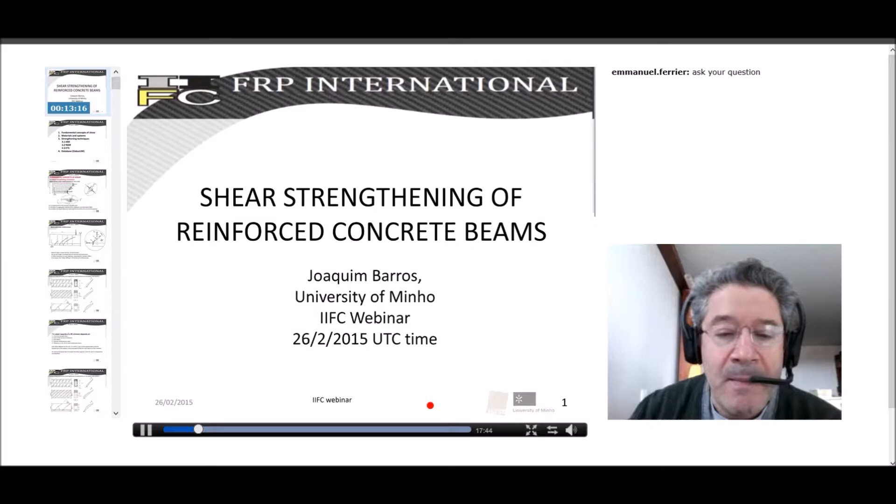The talk today, as Emmanuel has indicated, is about shear strengthening of reinforced concrete beams. This talk is quite close to the one I did last year, because it resumes what I think is fundamental on this type of subject. The presentation is organized into these main 4 topics.

The first one is the fundamental concept of shear. The second is about materials and systems, but I will not spend too much time on this topic because in previous webinars my colleagues have already talked about materials and systems used for the structural rehabilitation of concrete structures mainly. And the third one is in fact the most relevant topic, the main part of this presentation.

Because it's dedicated to the EBR, NSM, and ETS techniques for shear strengthening. And finally, I hope to have time to talk a little bit about the DabasUM, a database that we are developing at the University of Minho, with the main purpose of assessing or verifying the reliability of the available design guidelines for shear.

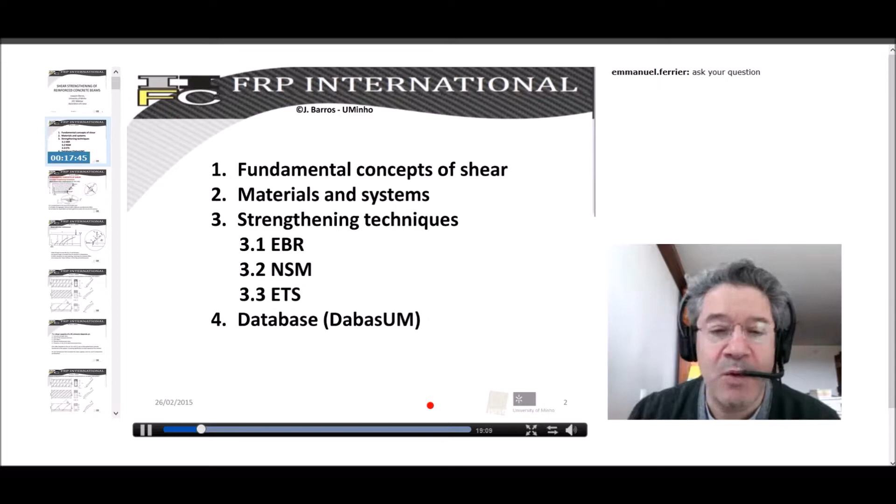Going directly to the first topic, dedicated to the fundamental concept of shear. In fact, when we have a reinforced concrete beam that fails in shear, it mobilizes mainly three types of mechanisms. This one, which I designate VCZ, is proportional to the concrete strength class.

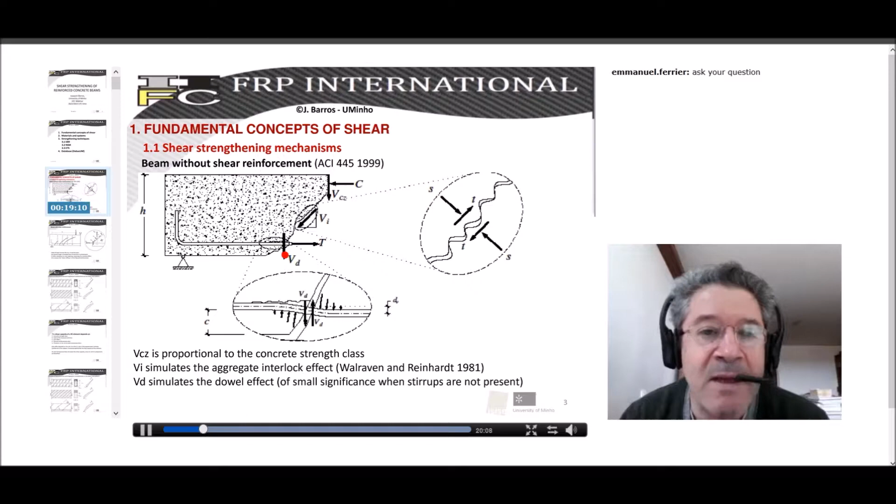This part corresponds to the uncracked zone of the concrete. The other one is VI, that simulates the aggregate interlock effect. And finally, the third one corresponds to the simulation, or the contribution, of the dowel effect, or the contribution of the longitudinal bars to the shear strengthening.

When we have the stirrups represented here, the stirrups have beneficial effects in all the previous terms, because, for instance, in the case of the favorable effect for the VCZ, what happens is that when we have these stirrups, we have a larger uncracked concrete zone, and consequently a higher contribution of uncracked concrete to the shear strength.

But the stirrups also have a beneficial effect for the VI contribution, for the aggregate interlock effect. Why? Because the stirrups crossing the diagonal cracks limit the crack width and the crack sliding, and the benefit we have is a direct benefit in terms of aggregate interlock, because the aggregate interlock is more effectively activated.

And finally, since the stirrups embrace the longitudinal reinforcement, what happens is that it increases the shear stiffness of this flexural reinforcement, and so it is promoting or increasing the dowel effect. So in fact, the stirrups have this type of benefit in all three terms that I explained before.

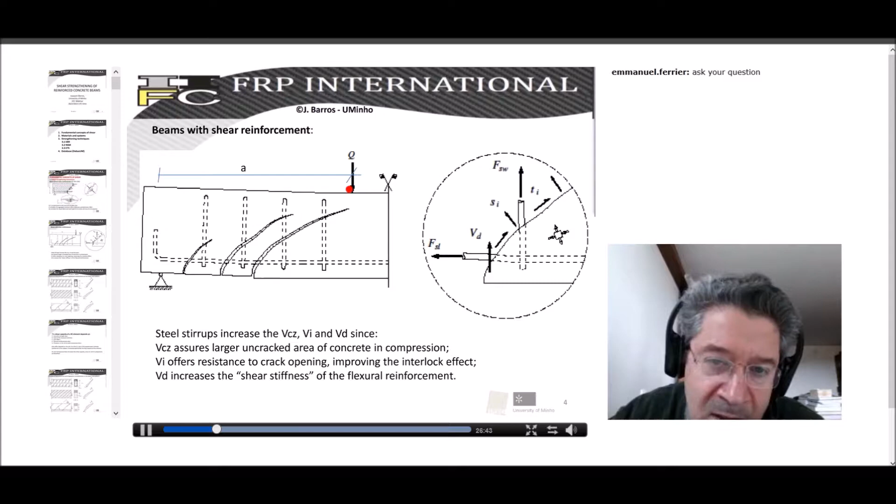A is the distance between the support and the applied load. And A divided by D, D is the internal arm, the distance from the longitudinal reinforcement up to the top surface of the cross section. When the ratio A divided by D is lower than 2.5, what can happen is that part of the load can be conducted directly to the support. In fact, in this case, we have a much higher load carrying capacity, caused by this arch effect.

The shear capacity, as we have already observed, is also dependent on the flexural reinforcement ratio, due to the dowel effect. And it also changes the profile of the crack opening evolution of the shear crack. It also depends on the axial compressive force, because when we have an axial compressive force, it contributes to a larger area of uncracked concrete, and also a smaller crack width, which promotes or enhances the aggregate interlock effect.

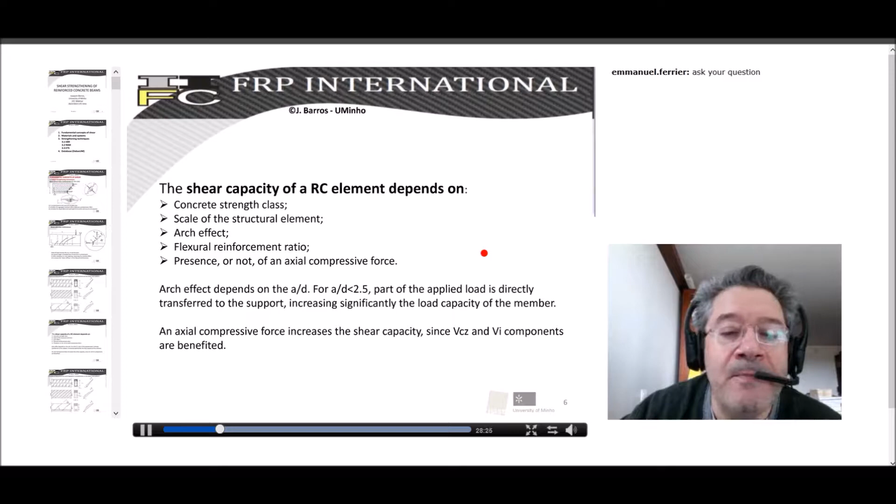So now, the idea is to present the fundamental concepts that are supporting the analytical formulations we will use to estimate the contribution of the FRP. But we need to start by understanding the fundamentals of the analytical formulation.

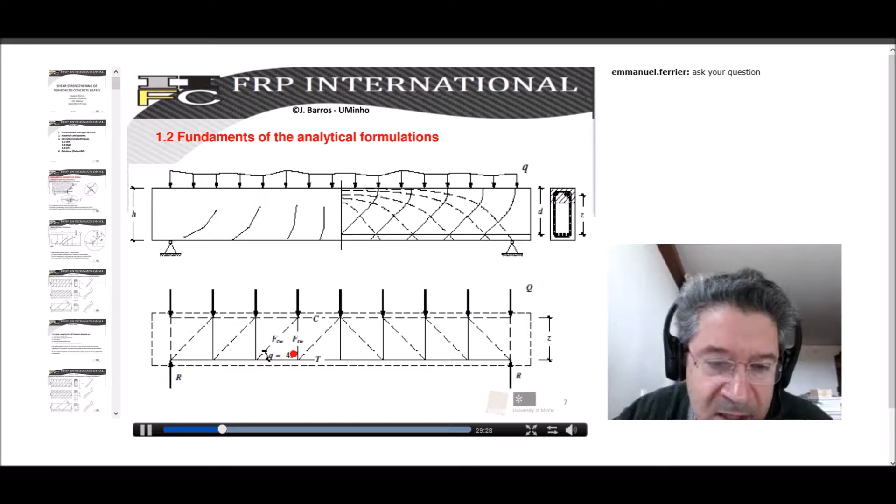When we have a beam supported with a certain descending load, in fact what we have are the isostatic compressive forces. Then we have the compressive struts, and we have the tensile ties, and these tensile ties need to be supported - the tensile force needs to be supported by the stirrups. This is what we are doing: we are introducing the stirrups to support these tensile forces.

If we have a representation of the forces formed when a beam is subjected to shear forces, we have a compressive force in the top part of the beam, the tension supported by the longitudinal bars, and we have a diagonal compressive strut and a diagonal tensile tie.

From equilibrium, the shear force, designated by V, is the vertical projection. The shear force is supported by the tensile force in the stirrup, projected to the vertical direction. This is the force installed in the stirrup, and this is the inclination of the stirrup, and when projected to the vertical it should be in equilibrium with the vertical force.

The force supported by the stirrup - if, for instance, the stirrup has two legs as is normal, we need to take into account that here we have 2 times the cross-section area of the vertical elements. The force supported is the number of stirrups that we have along this length.

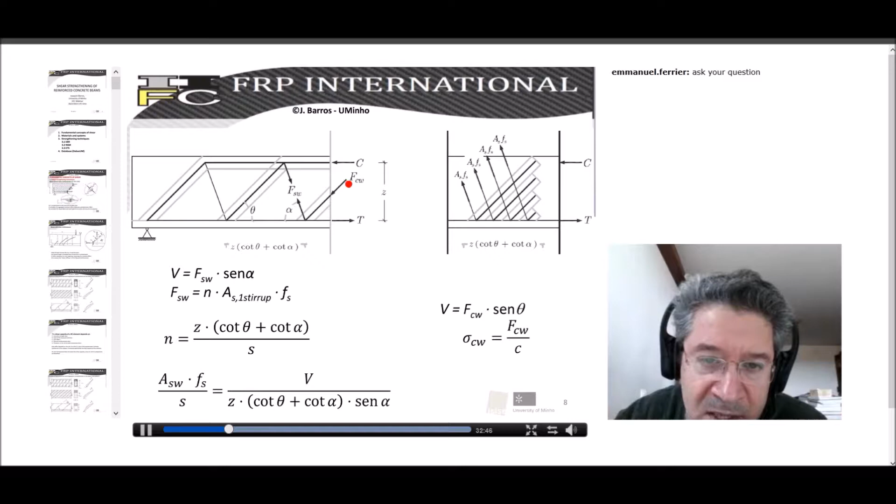So this is the normal equation that we use to evaluate the number of stirrups needed to support the shear force installed in a certain cross-section of the beam. Finally, we need to verify that we do not have crushing in the concrete compressive strut, otherwise we can have a very brittle failure mode.

Now, if we want to increase the shear capacity of a reinforced concrete beam by installing FRP systems, we can have a contribution designated by VF. So the total resisting force is the contribution of the concrete plus the contribution of the existing steel stirrups, now adding a term that is the contribution of the FRP.

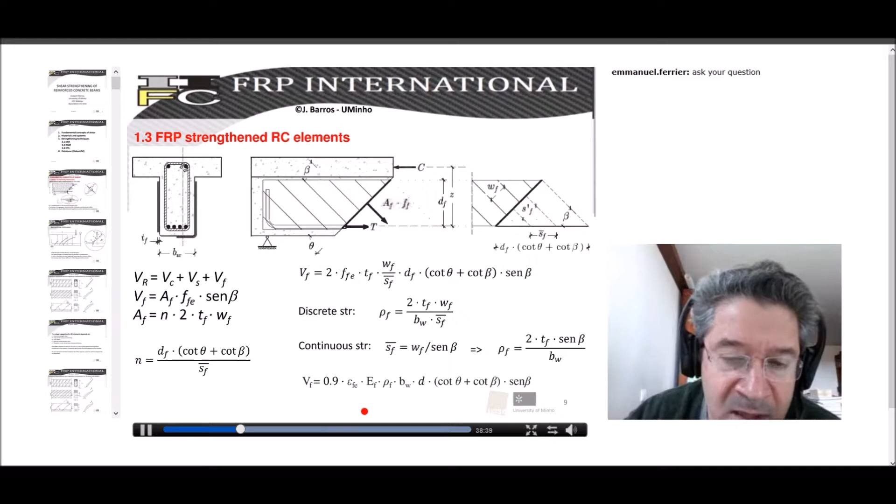So now the problem is how to evaluate the effective strain. According to the available experimental research in this topic, we realized that the effective strain decreased significantly with the stiffness of the FRP shear strengthening configurations.

And this stiffness is a product of the shear reinforcement ratio by the elastic modulus of the FRP materials that we are using.

This data was obtained by Professor Triantafillou some years ago, and this data is from Khalifa, who was in fact a co-author. But what happened is we realized that we see a clear tendency for a decrease of the effective

tensile strain with increase of the stiffness of these FRP systems. And it was proposed this equation that evaluates the R parameter, and then R is multiplied by the ultimate strain, and then we can have an estimation of the effective strain.

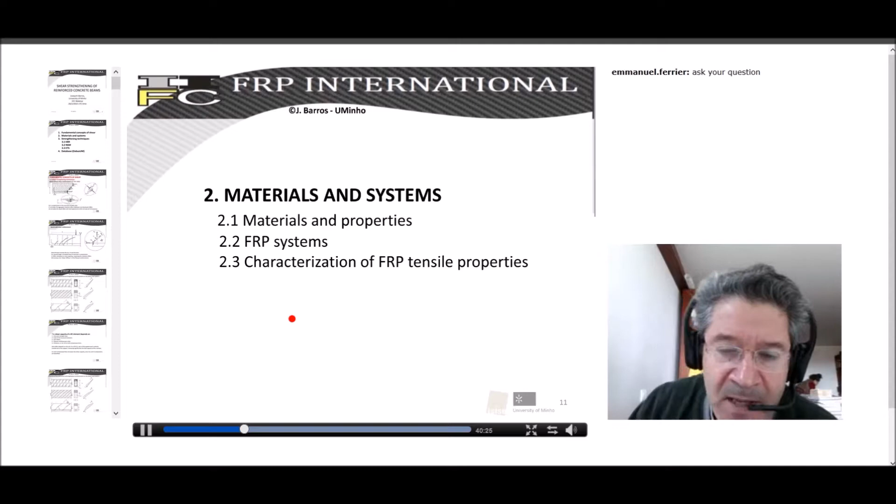Now I have a short presentation about materials and systems used for shear strengthening, but I will not spend too much time on this topic because, as I told already, my colleagues talked about this in the previous webinars. So this is the relationship between stress and strain for several types of materials.

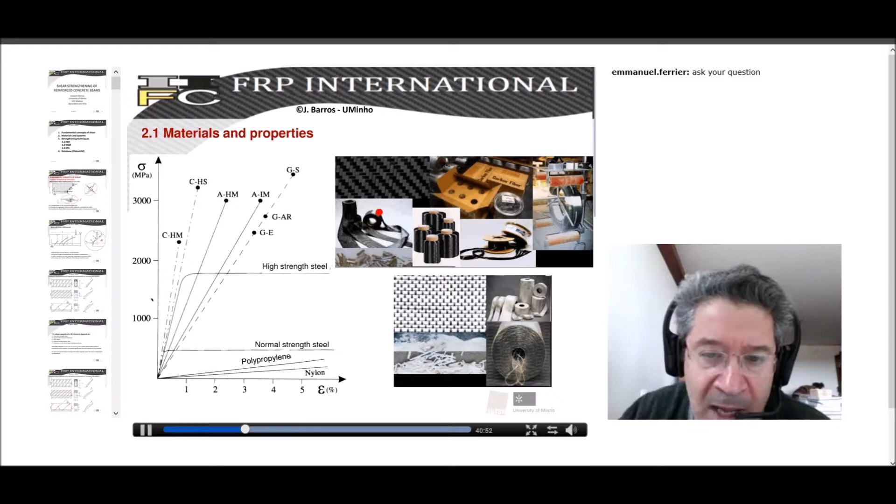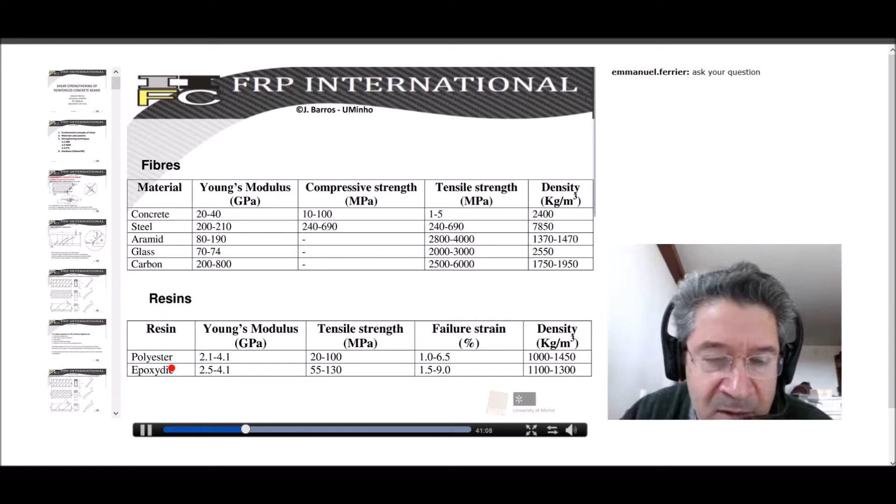But in case of shear strengthening, we are mainly using carbon fibers, using wet layup systems or laminates. We use in general epoxy resins to bond the CFRP systems to the concrete substrate, and the properties are indicated in these tables.

I will not spend time on this because you know this quite well. In terms of FRP systems, we have the prefabricated types where we can use bars or laminates, and then we use an adhesive system to glue or fix the FRP bars or laminates to the concrete substrate.

Or we can also use a wet layup system that is formed by a sheet or tissue, and it is also fixed or bonded to the concrete substrate by an epoxy system.

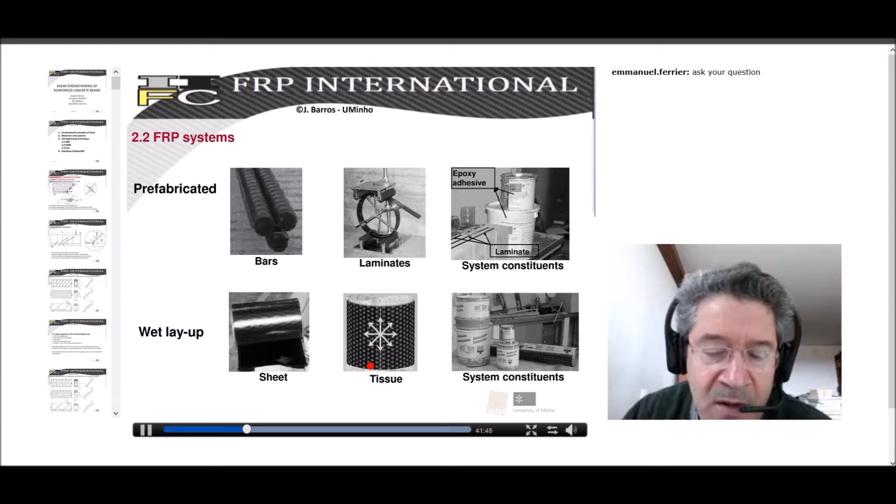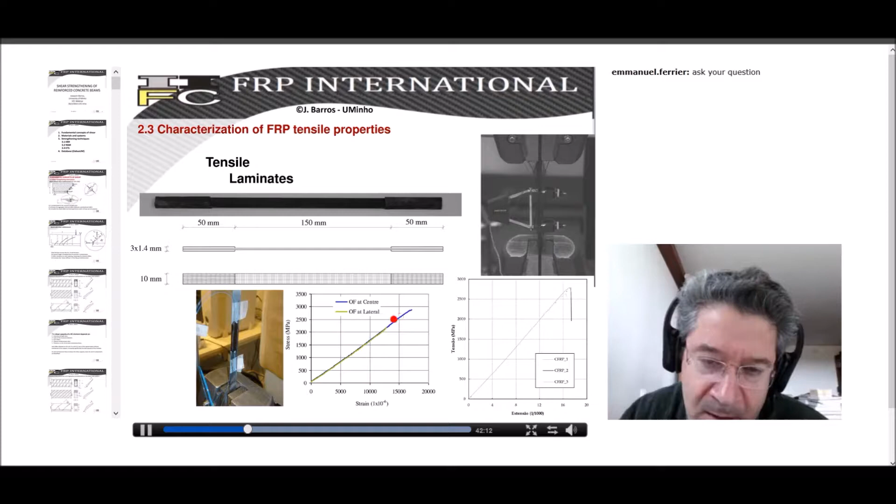To characterize these materials, we executed some coupons of laminates or wet layup systems, and we execute tensile tests in order to obtain the stress-strain relationship that, as you know, presents a linear elastic diagram and then fails abruptly.

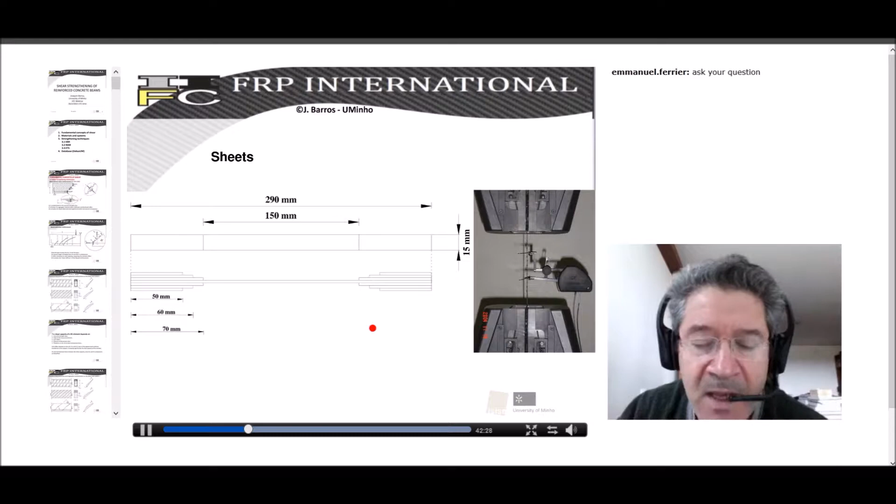So this is the type of coupons that we produce to characterize the tensile behavior of the wet layup systems.

It is also important to characterize the properties of the adhesives, mainly when we want to model the nonlinear behavior of reinforced concrete beams strengthened with CFRP systems.

In this case, it's important to know the relationship between stress and strain, and we realize that it is almost linear in the first stage, but then due to the formation of micro cracks in the microstructure of the adhesive, we have a non-linear behavior up to failure.

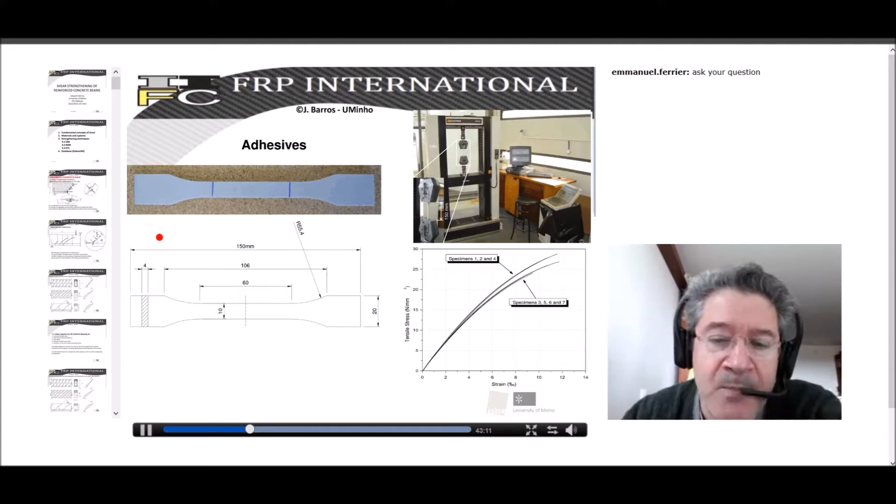In terms of strengthening techniques, as I will analyze in this lesson, I'm focusing mainly on three techniques: the EBR, the NSM, and the ETS.

In the EBR technique, I will present the shear strengthening configurations most used in this technique, as well as the shear strengthening effectiveness based on experimental evidence.

And finally, I will present the design formulations according to FIB, the European approach, the American approach ACI, the Italian design guideline, and the Australian design guideline.

And then I'll use an example in order to teach you how to use this formulation to estimate the contribution of the FRP system to the shear strength of a reinforced concrete beam.

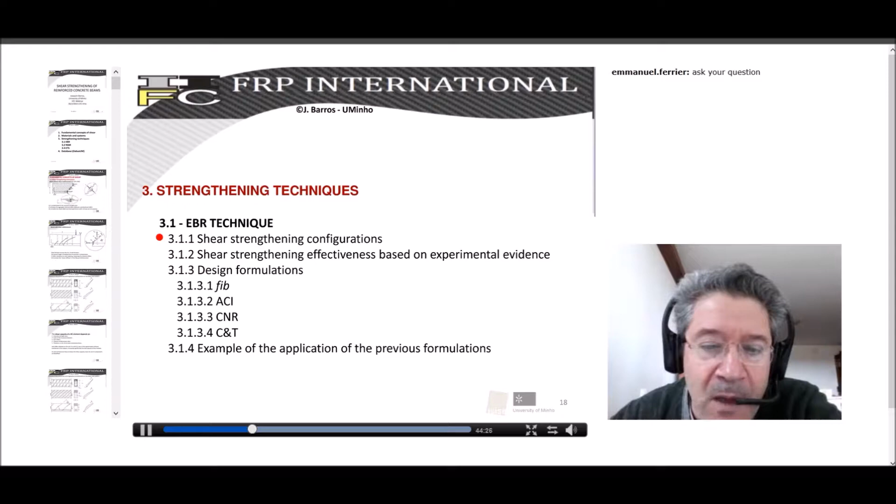The most common EBR strengthening configurations are represented here. This is a full wrapping, and I use the symbol O to indicate the full wrapping shear strengthening configuration. We also have a U configuration where the FRP systems are bonded to lateral surfaces, but also to the bottom surface of the cross section.

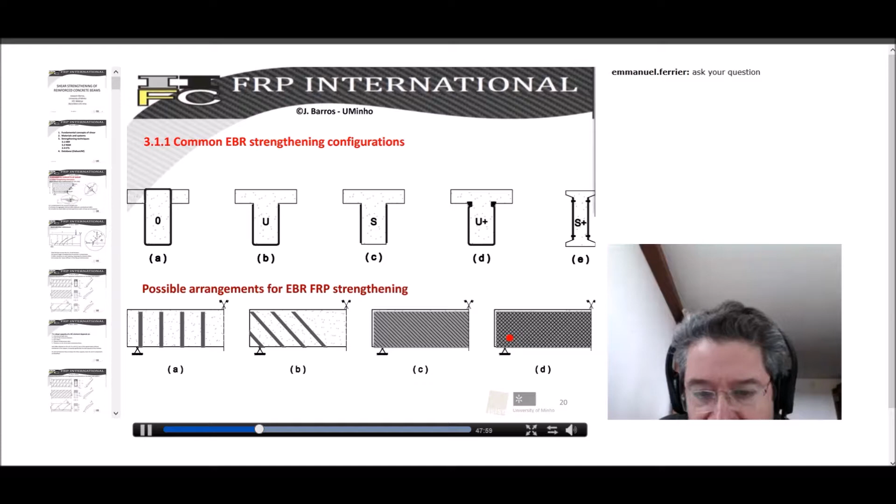I'm presenting now some experimental results to show important aspects in terms of the effectiveness of different shear strengthening configurations. This was a study carried out by Professor Khalifa, where we have the reference beam C-BT1, C-BT2, and one layer of U configuration where the fibers are in the vertical direction.

In C-BT3, 2 layers were installed: a vertical layer with the fibers oriented at 90 degrees (vertical), and another layer in the horizontal direction, at 0 degrees. So 2 layers in this case.

In C-BT4 and C-BT5, we are using strips of wet layup system, where each strip has a width of 50 millimeters, and the distance between strips is 125 millimeters. In C-BT4 the same strips with the same width and spacing are used in a U configuration, while in C-BT5 they are installed only on the lateral faces in an L configuration.

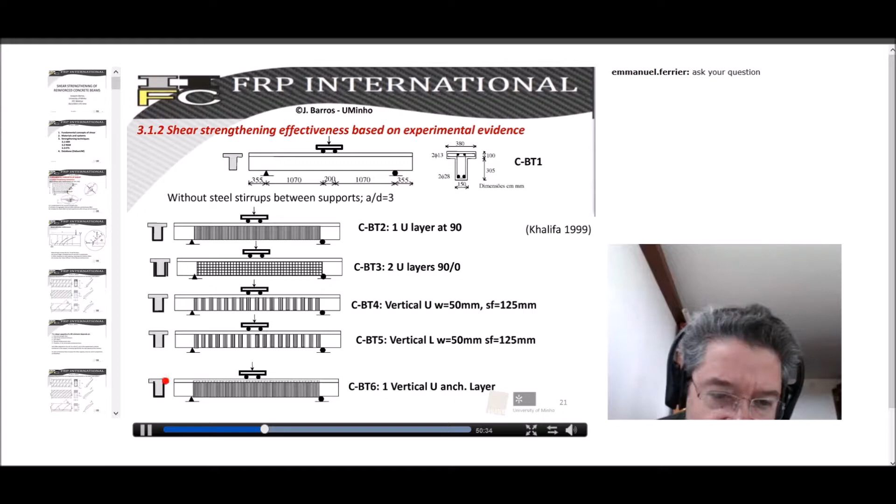Finally, in C-BT6, we are using a vertical layer, a U configuration with fibers in the vertical direction, but in the top part of the U configuration we are installing an anchorage mechanism, an anchorage device.

Here we have the relationship between the applied load and the mid-span deflection. The first clear aspect is comparing the force-deflection relationship obtained in the reference beam, where we don't have any shear strengthening system, that gives the minimum load. For the other beams, we realize a significant increase in ultimate load, between 35% and 145%.

A very important aspect is comparing the beam with 2 layers in U configuration, where one layer has fibers at horizontal direction (0 degrees), to the same beam with only 1 layer applied in vertical, without the horizontal layer. We realize the values are almost the same, so the horizontal layer has a very small contribution to the shear capacity of the beam.

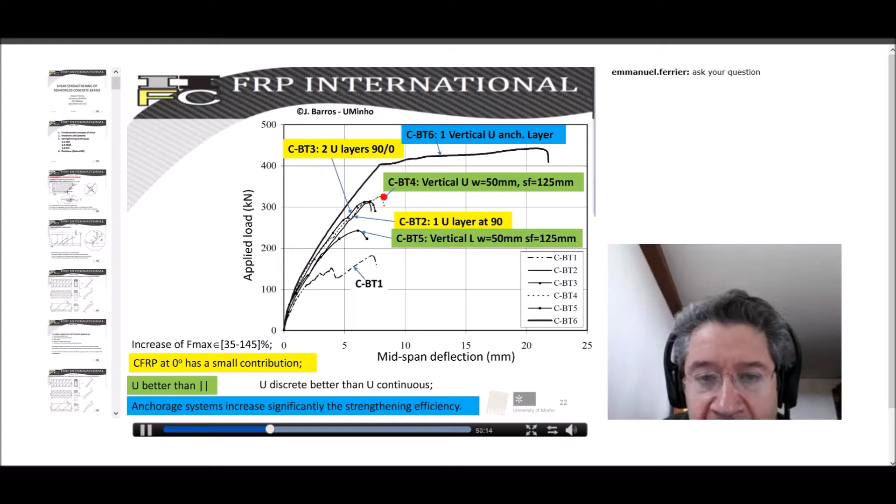Another aspect: comparing the beam with vertical strips of wet layup system, formed by strips of 50 millimeters width spaced at 125 millimeters, to the one composed of the same type of strips but placed laterally, we realize that the U configuration is much more effective in terms of shear strengthening than the one with FRP systems applied only on lateral faces. This is a very important aspect.

Finally, we realize that when we introduce anchorage mechanisms, we increase the capacity significantly, and in this case it was possible to transform the shear failure mode into a flexural failure mode.

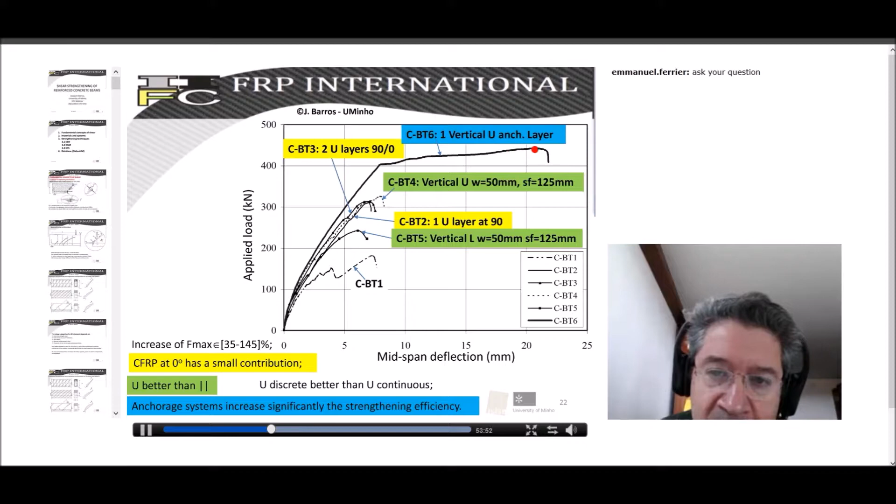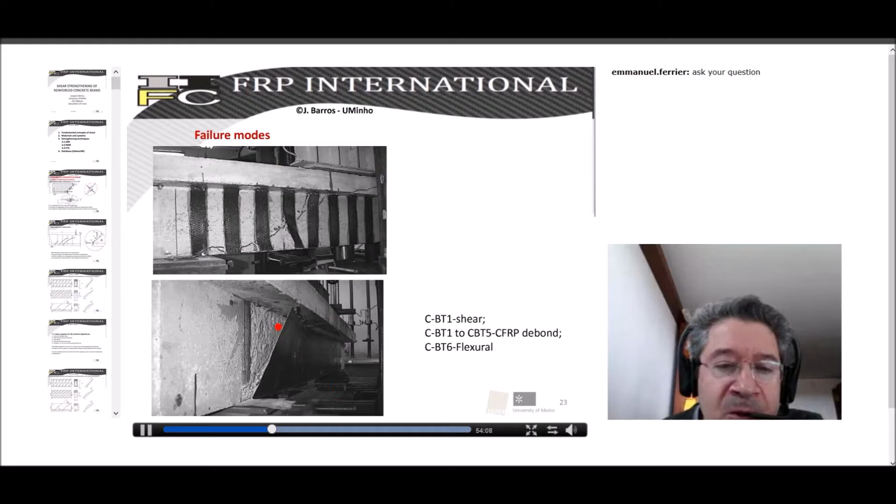Well, now this is the typical failure mode. We have debond in case of a continuous system formed by wet layup system. And here in this case, we have also the rupture of the FRP and debond.

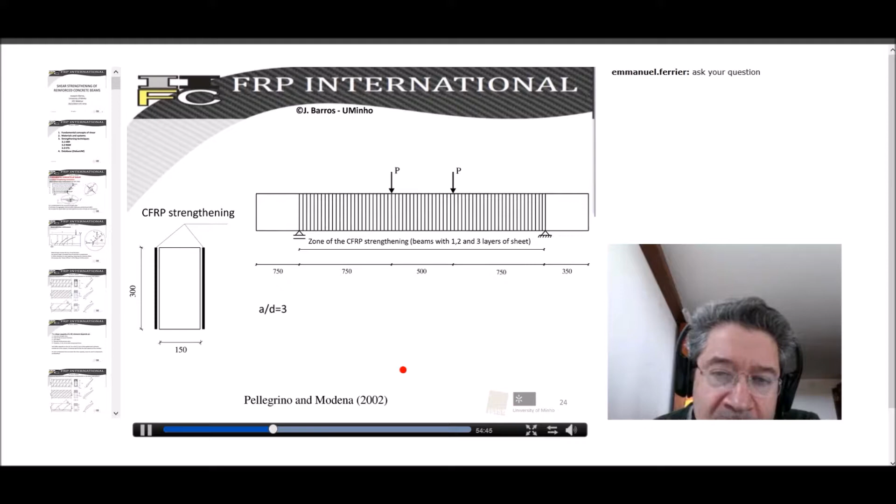In another work done by Professor Pellegrino and Professor Modena, they executed an extensive program, but I will focus on only one very important aspect: the influence of the existing steel stirrups.

For instance, in this beam, 3 layers of CFRP were applied, installed on the lateral faces. But in this case, the beam does not have stirrups, so the existing shear reinforcement ratio is 0.

When we apply the 3 CFRP layers, we obtain an increase of the shear strength capacity for the beam. The increase was 51%.

For the same beam, but with a difference of having a certain percentage, 0.33%, in terms of existing shear reinforcement ratio assured by steel stirrups, we realize that the increase provided by the same shear strengthening arrangement was only 32%.

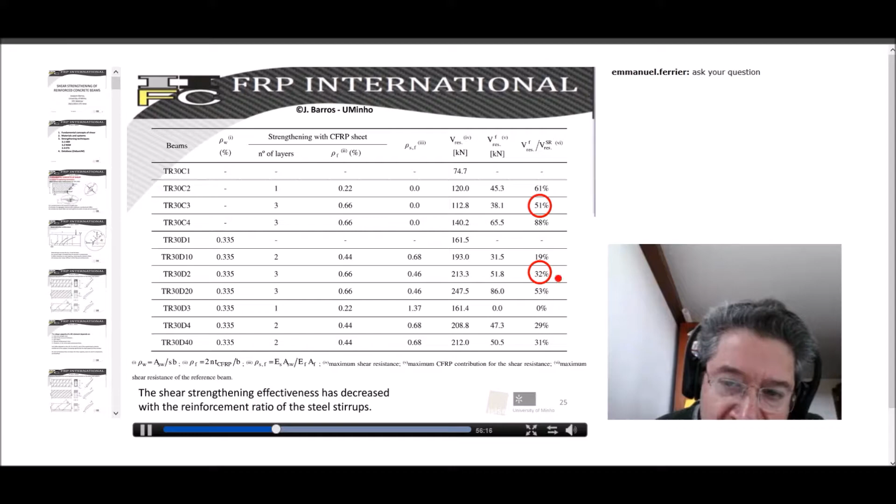This is also observed in all experimental research carried out by several people: the shear strengthening effectiveness decreases with the increase of the reinforcement ratio assured by steel stirrups.

Now, how do we evaluate or estimate the contribution of the FRP systems for the shear strengthening of reinforced concrete beams? We assume this approach: the shear resistance of reinforced concrete beams is the additive contribution provided by the concrete, VC, plus the steel stirrups, plus the contribution of the FRP.

I have here the equations proposed by the FIB, the International Federation for Concrete, and the ACI, the American Concrete Institute, the CNR, the Italian design guideline, and CIDAR, the Australian design guideline.

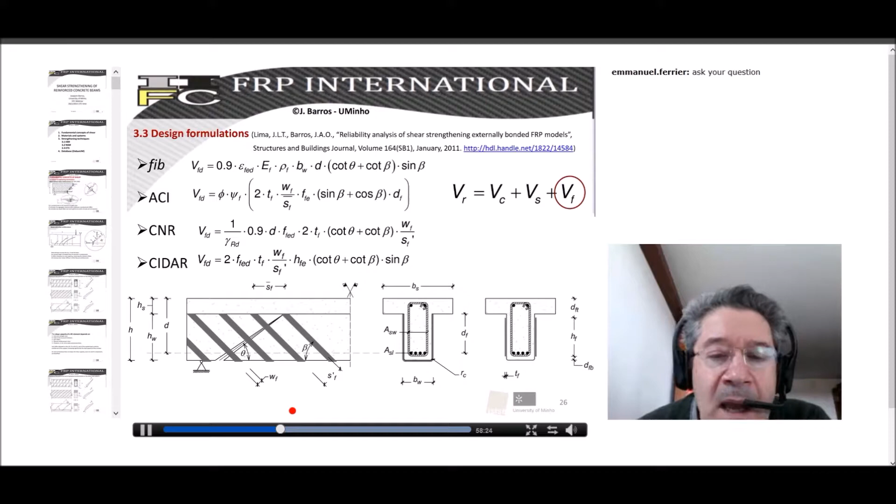In this figure, I have the symbols used in the formulation: that is the inclination of the FRP, that is the inclination of the shear crack, and dF is the distance from the top level of the FRP to the longitudinal reinforcement.

DFT is the distance from the top level of the FRP to the top surface of the cross section. The DFB is the distance from the bottom level of the CFRP to the bottom level of the cross section, or the bottom surface of the cross section.

RC is the radius of the rounding, because in order to avoid stress concentration in the corners of the cross section, we must round these corners, and this is the corresponding radius.

I'm presenting here the formulation of FIB and ACI. In case of the FIB, this is the equation we use to evaluate the contribution of the FRP, and that depends on the shear strengthening ratio obtained from this equation, in the case of using strips of CFRP or continuous systems, this is the equation.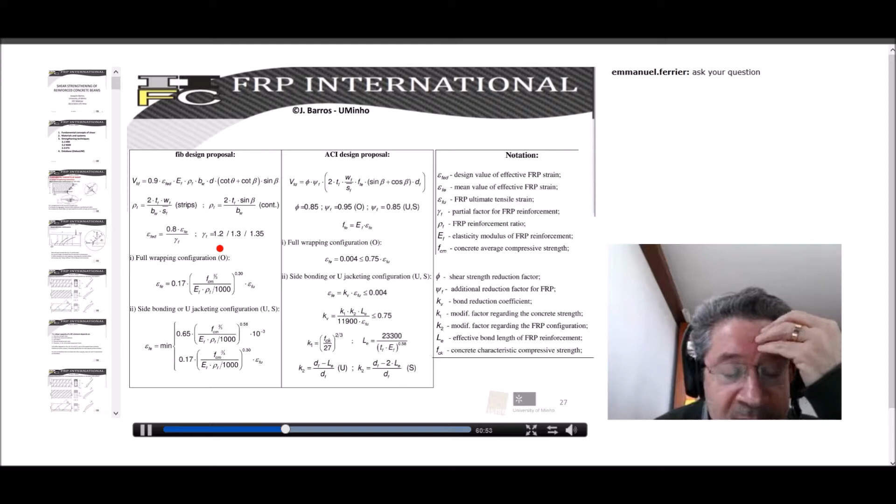Now we need to estimate the effective, or design value of the effective strain in the FRP. Finally, the FIB recommends a safety factor of 1.2, 1.3, or 1.35, depending on the quality control assured when applying these shear strengthening systems in real practice.

We need to distinguish two situations. One is when we are using a full wrapping configuration, involving the entire cross section. In this case, FIB proposes an equation that depends on the average compressive strength of the concrete and the stiffness of the FRP system.

When we use a U or side strengthening configuration, the effective strain is the minimum of the values provided by these two equations. So we need to evaluate both equations, and the minimum one is used to evaluate the effective strain. After we evaluate the effective strain, we replace it here, divide by the safety factor, and finally obtain the design value to estimate the contribution of the FRP system for shear strength according to the FIB.

In case of the American Concrete Institute, this is the equation proposed to evaluate the contribution of the FRP system. It is recommended a phi factor value of 0.85, and for the psi f factor, 0.95 if we adopt a full wrapping configuration, or 0.85 in case of U or side configuration. To estimate the effective stress in the FRP, we need to evaluate the effective strain, because the effective stress is the product of the elastic modulus of the FRP by the effective strain.

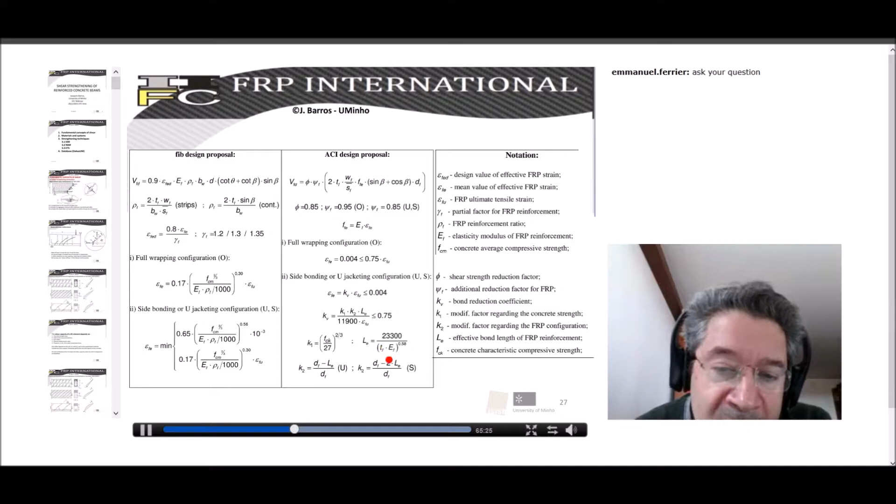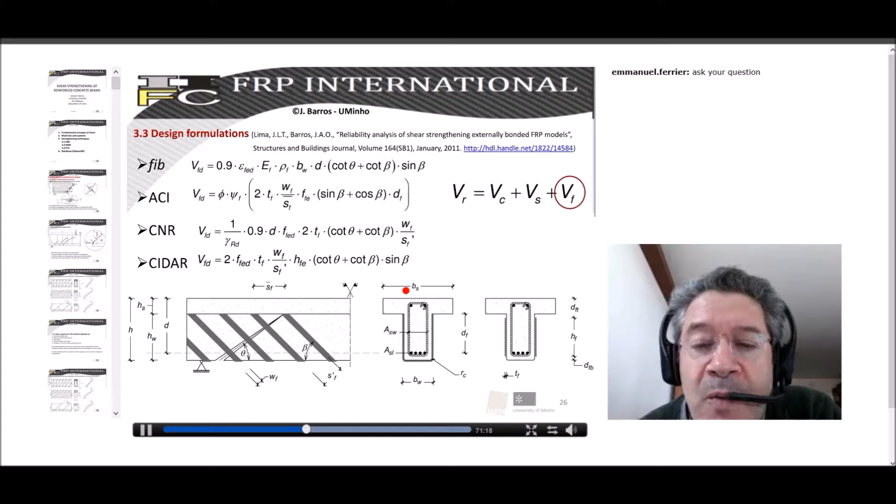So all the information represented in this figure is used now to evaluate these geometric parameters: HFE, ZB, and ZT.

And to evaluate the design value of the effective tensile stress, CIDAR proposed two parameters. The one that is DF is a stress distribution factor, that is evaluated by different equations according to the type of shear strengthening configuration that we will adopt.

And finally, is the maximum design value of the tensile stress installed in the FRP.

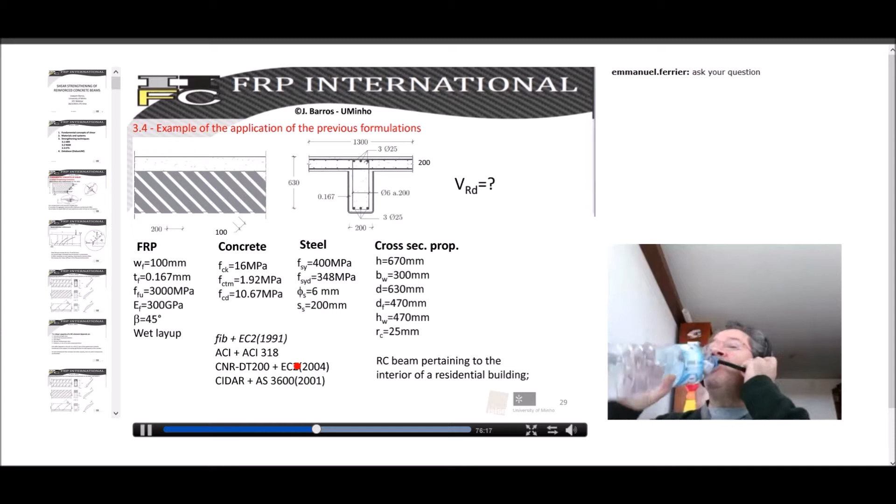Imagine that we have a reinforced concrete beam with this geometry, that has a width of 200. The total depth is 630. This is the longitudinal reinforcement in the bottom, in the top, and it has also some steel stirrups.

Well, the idea is to estimate what is the value, or the shear capacity, of the beam when we install strips of the CFRP with a width of 100 millimeters, indicated here.

The thickness of the FRP is 0.167 millimeter. The ultimate tensile stress is 3000 megapascal. The Young's modulus is 300 gigapascal. The inclination of the FRP is 45 degrees, and we are using a wet layup.

We assume that the concrete of this beam has a characteristic compressive strength of 16 megapascal, an average tensile strength of about 1.9 megapascal. The design value of the compressive strength is 10.7 megapascal.

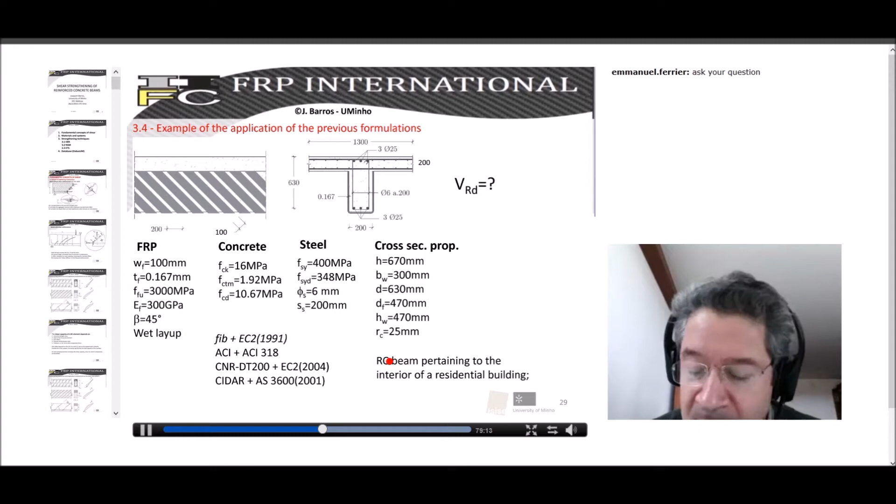Now we will use the FIB approach to estimate the contribution of the FRP plus the Eurocode approach that was the edition of 1991. So nowadays we have a more recent one that we will use with CNR, because CNR is also a more recent approach. So the idea is to be coherent.

So when FIB was published, this formulation to evaluate the contribution of the FRP, the document available to estimate the contribution of concrete and steel stirrups was EC2 of 1991. And now we will start evaluating the shear strengthening ratio.

So this is evaluated from this equation that depends on the thickness, on the width of the strips of CFRP, and on the width of the cross section and the distance between the strips. And then we obtain the corresponding value.

To evaluate the effective strain, tensile strain in the FRP, well, it is the minimum between the two values obtained from these two equations.

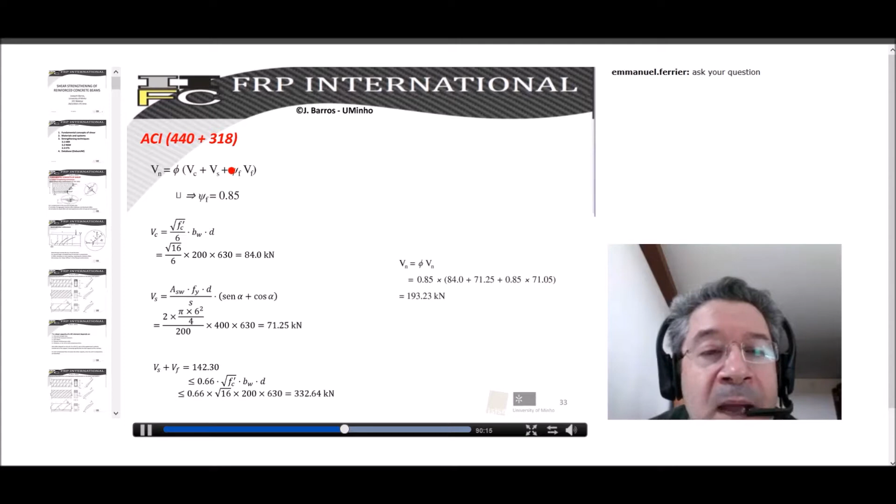And finally, we obtain the shear capacity of the strengthened beam, which is the product of phi, that according to ACI is 0.85, multiplied by the contribution of the concrete, 84, the contribution of the steel stirrups, 71, and the contribution of the FRP, which should be multiplied by the psi f factor, that for U configuration is 0.85. Finally, we obtain the shear capacity according to this approach.

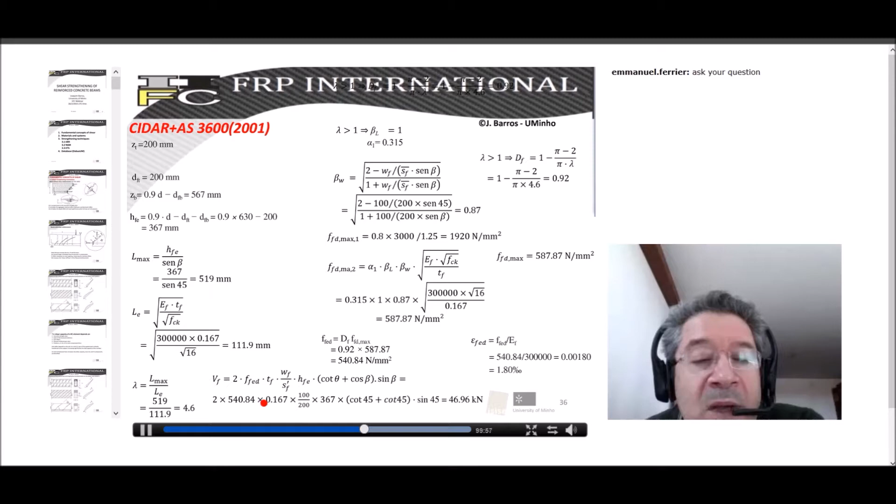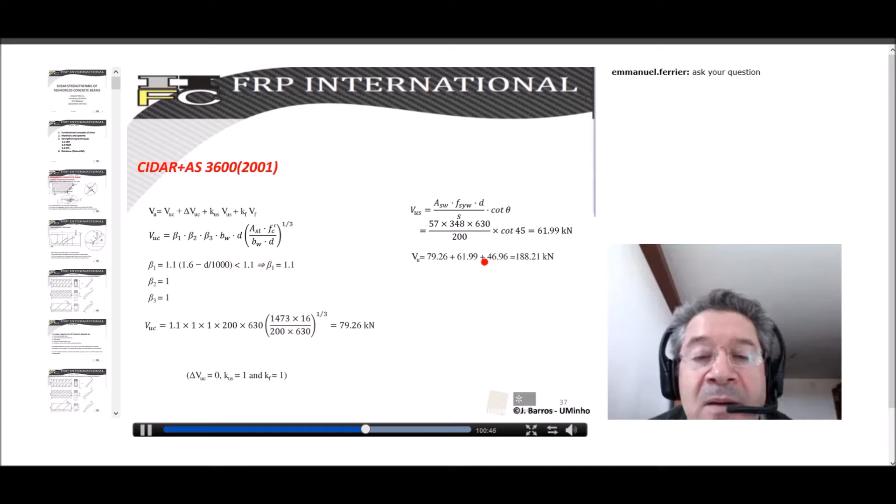So now we use this term, we replace it, and consequently we obtain the contribution of the FRP, computed according to the CIDAR, and considering the Australian design guideline to evaluate the contribution of the steel stirrups and the concrete. This is the equation to evaluate the contribution of the concrete, while this is the equation to estimate the contribution of steel stirrups. Finally, we obtain the shear capacity of the beam, that is the contribution of the concrete, contribution of the steel stirrups, and contribution of the CFRP system. We can compare this in this table.

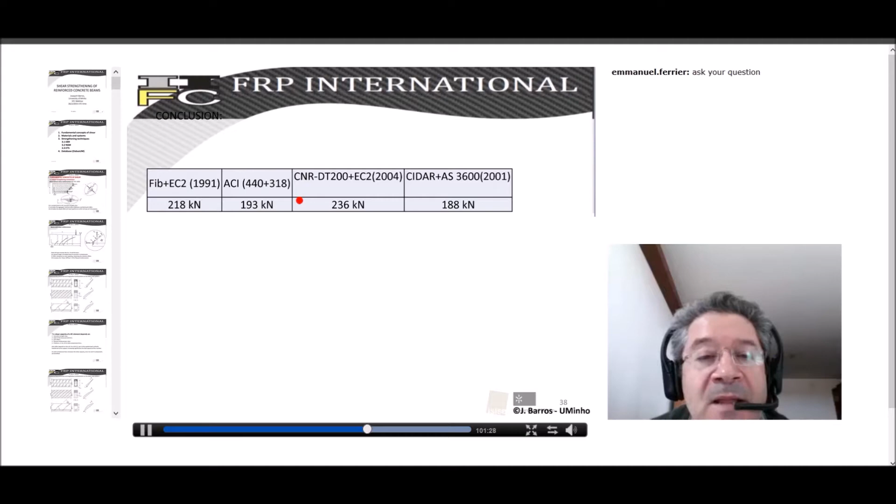I'm comparing. So in fact, the highest value was obtained applying the CNR, the Italian design guideline, with the Eurocode, while the minimum value was predicted or obtained using the CIDAR and the Australian guideline. But the differences are not quite high for this example.

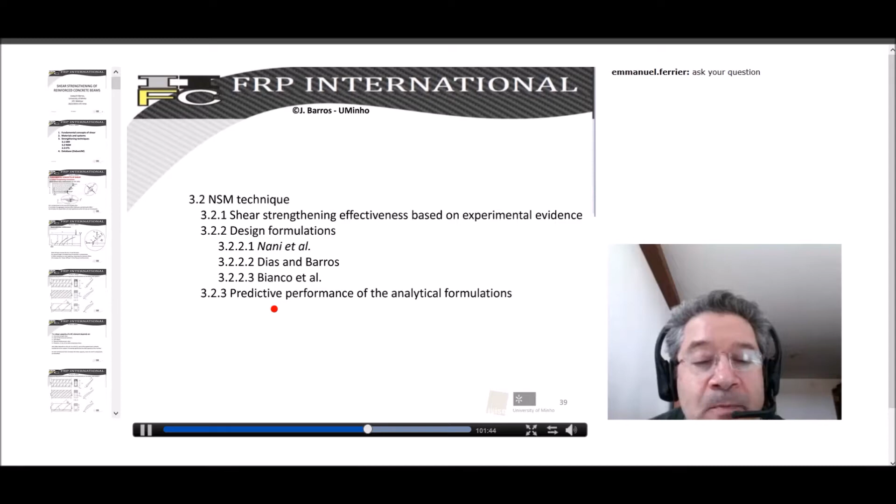Well, for the NSM technique, the near surface mounted technique - I don't know if we have some knowledge on this topic - what we use is we apply the FRP systems in the lateral surfaces of the beam. So we need to open or execute slits in the lateral face, in the concrete surface, in the concrete cover of the lateral surface of the beams.

So in this case, we see several slits open on the lateral face, so we need to clean. Then we cut the laminates or FRP bars. We are cleaning the FRP, in this case the CFRP systems, and in this case we are using CFRP laminates.

Then we fill the grooves with the epoxy. We apply a thin layer of epoxy in the lateral face of the laminates, and then we insert the laminates, and finally we remove the exceeding epoxy, and we finalize the process of applying the strengthening technique using the NSM.

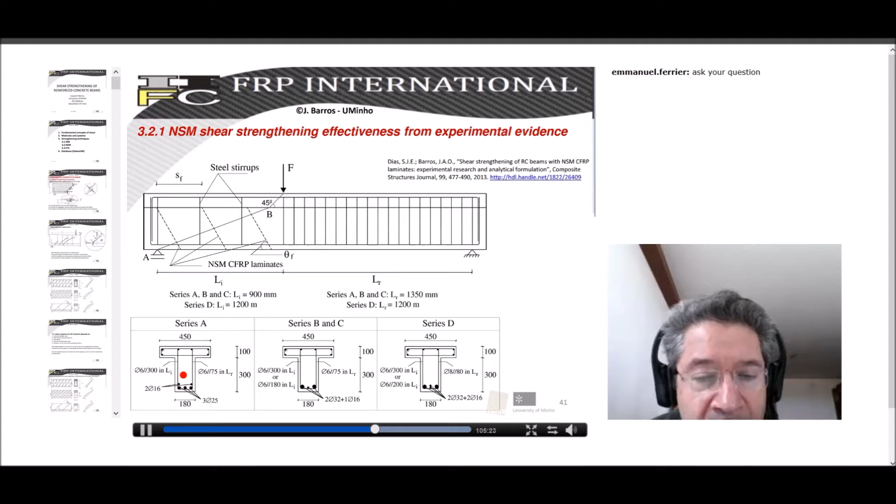And then look what happened in terms of the influence of the compressive strength of concrete. In series C, in the series of beams, we used a concrete of very small compressive strength - the average value was around 19 megapascal. In series B, we adopted a concrete of about 40 megapascal. And finally, in series D, we used a concrete of about 60 megapascal.

And in this graph, we have a relationship showing the contribution of the FRP system, which was composed by laminates. In this case, we used rectangular cross-section FRP laminates with a cross-section area of 1.4 millimeters by 10 millimeters.

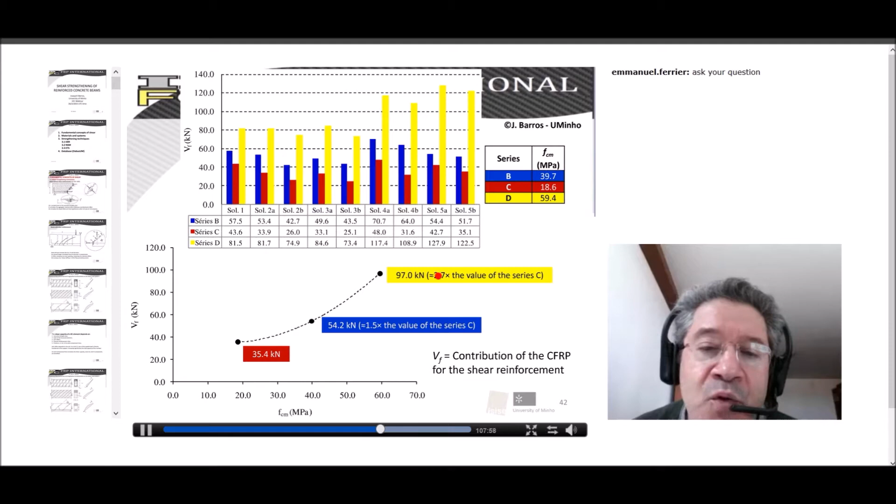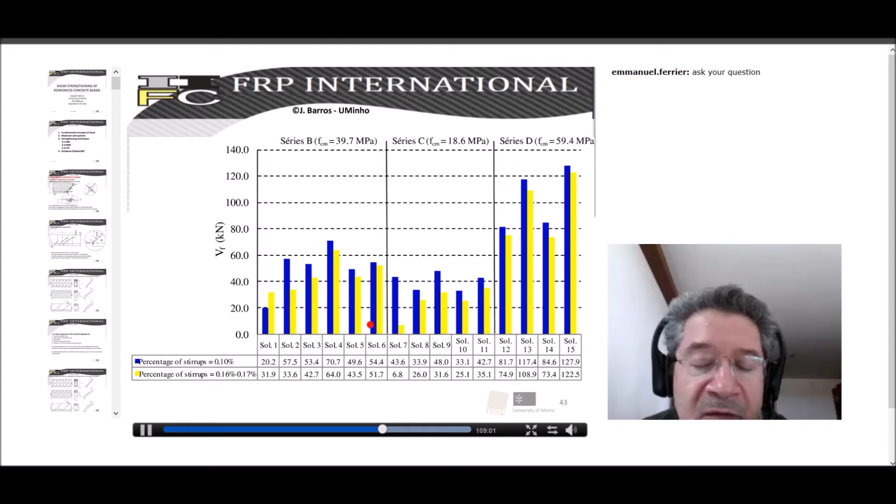Another important conclusion from this series of tests concerns the effect of the percentage of existing steel stirrups. In yellow, we have the contribution of the CFRP beams when using the highest percentage of steel stirrups, between 0.16 and 0.17. In blue, the percentage was 0.10. From these graphs it's clear that as the percentage of existing steel stirrups increases, the effectiveness of the shear strengthening arrangements decreases.

This means we can have three types of failure modes. We can have rupture of the laminate, which we observed when reinforcing beams with the highest compressive strength—in some cases the laminates even failed by rupture. In other cases, we have bond failure followed by fracture of the concrete surrounding the laminates.

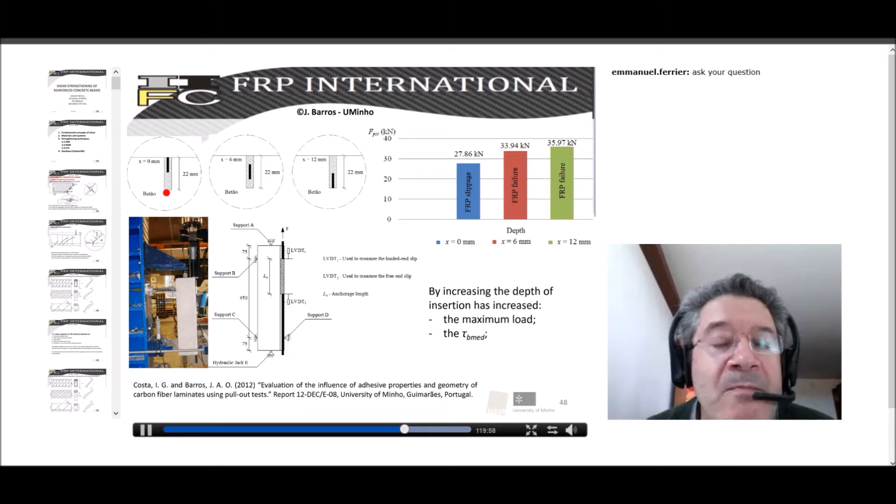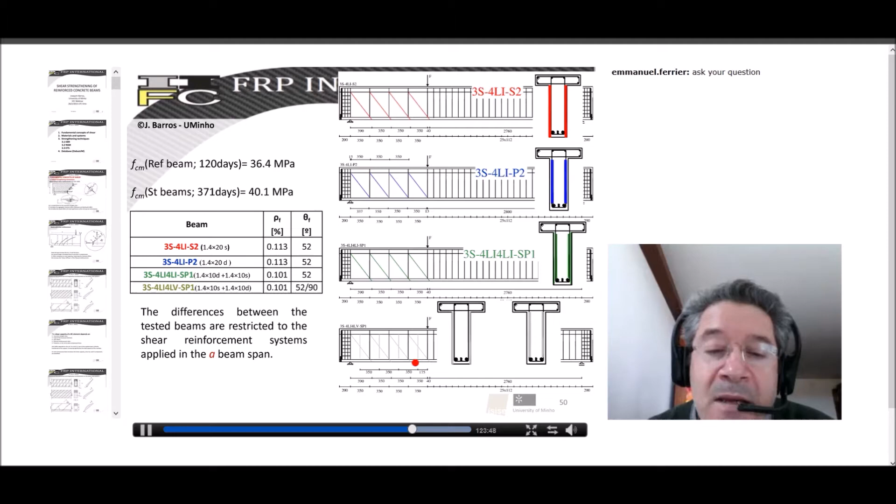And I only highlight the relevant aspects. Look, for instance, if I'm comparing these two beams, this is the force-deflection for all the beams, and if I'm comparing the shear strength contribution...

for the beam where we install 4 laminates but deeper, and 4 laminates at the surface, we obtain a shear strength effectiveness of about 68%, while when I install the same laminates but deeper in the groove, I obtain a shear strength effectiveness of 81%.

So, in fact, we can conclude that if we have the possibility to install the laminates deeper in the cross section of the beam, we have a higher effectiveness for the FRP systems.

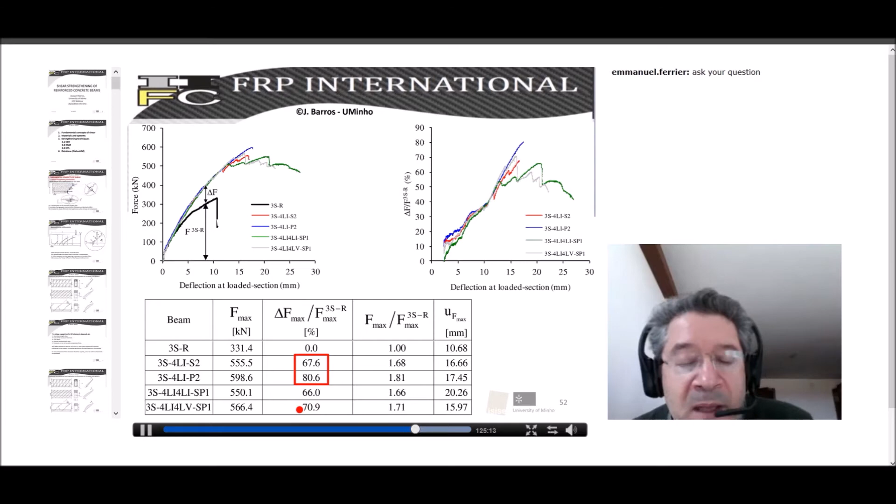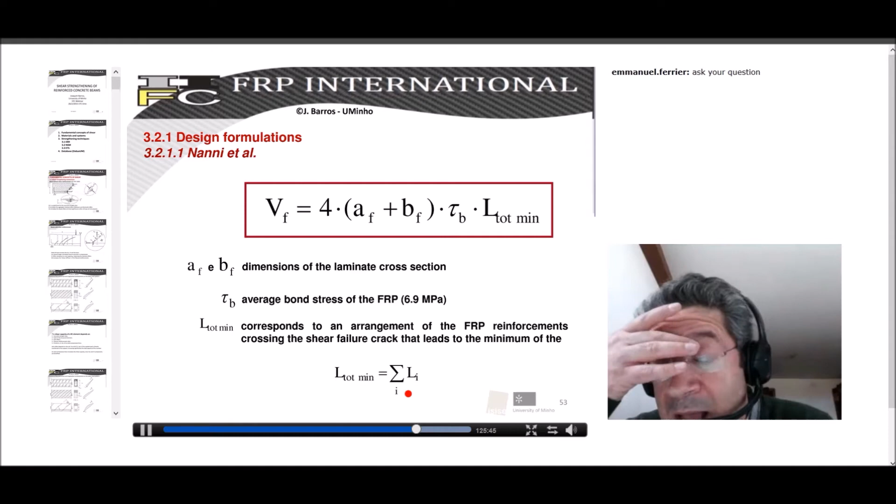So this is the equation or the formulation proposed by Professor Nanni and his co-authors to estimate the contribution of the NSM system.

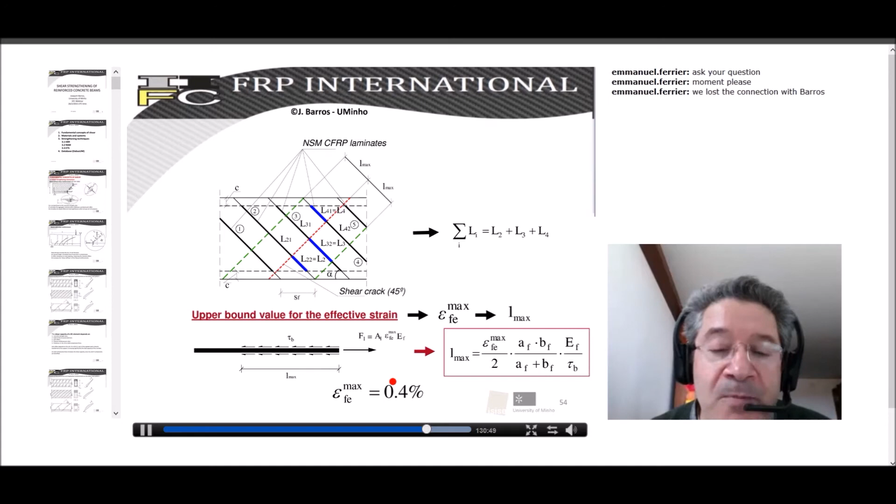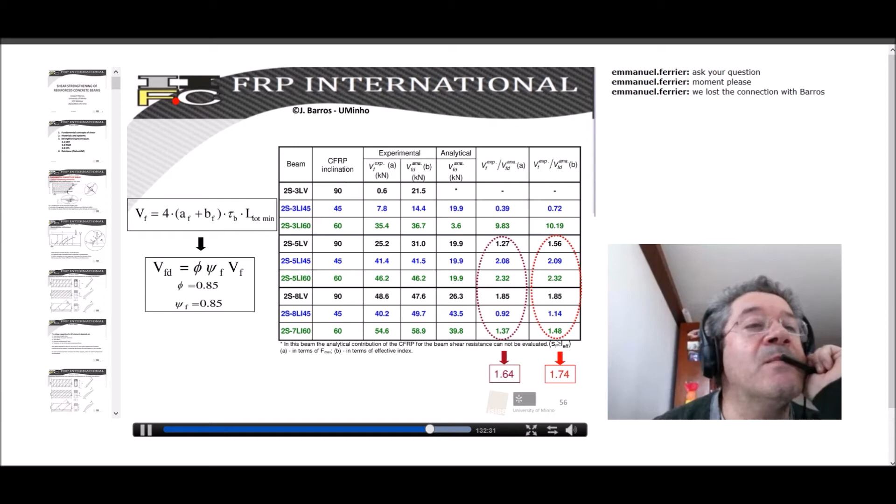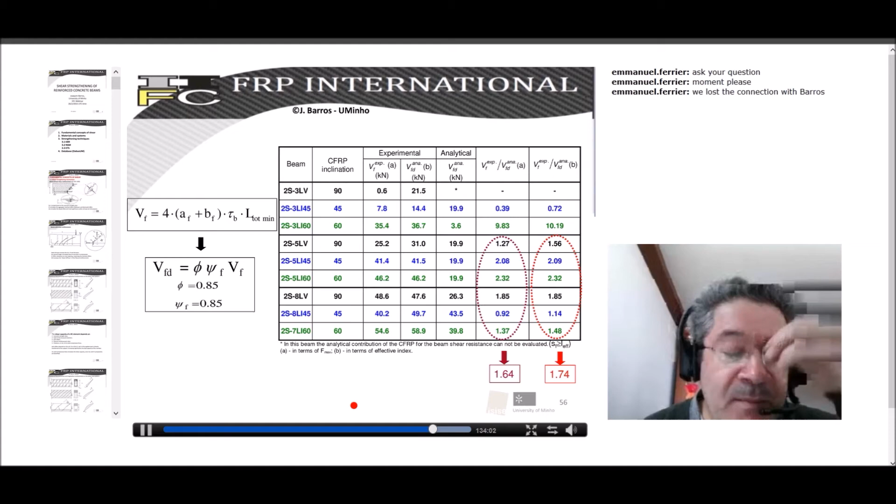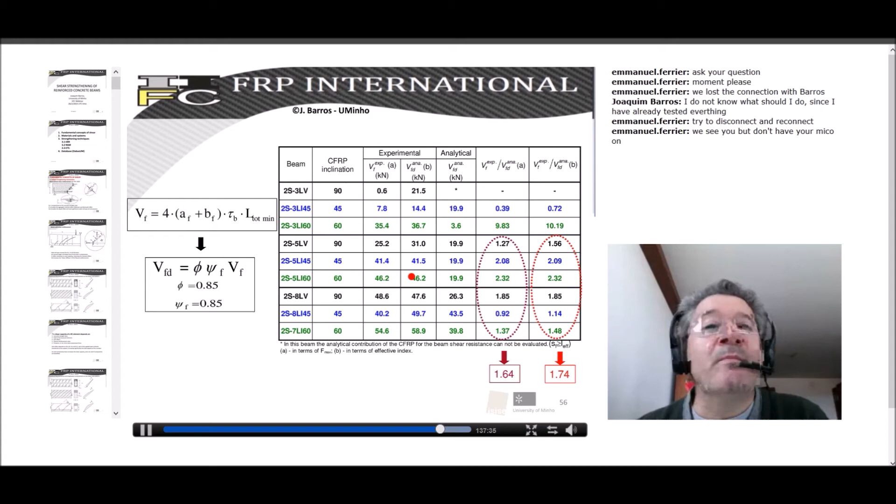Joaquim? Joaquim? Joaquim? Hello. So I don't know why we are not hearing. Joaquim, maybe something's wrong. So we'll try with Joaquim to reconnect to see if he can finish the presentation. Joaquim is here, but again, you don't have audio. Joaquim?

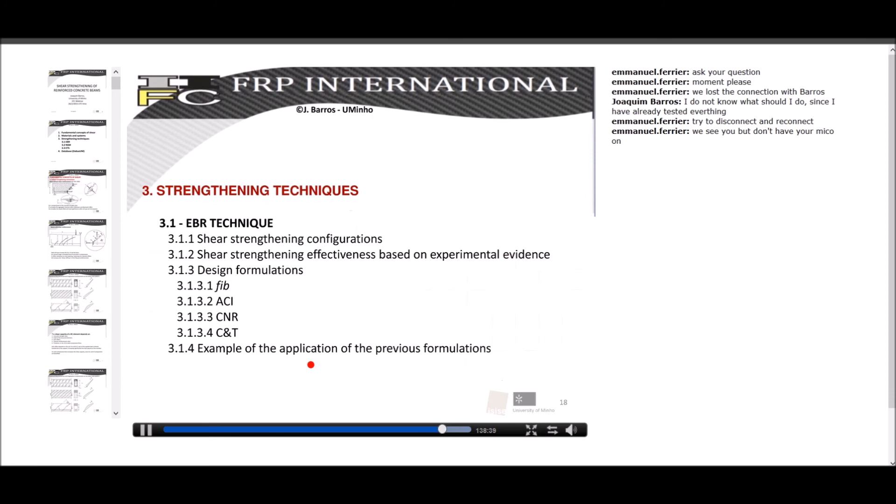Yes, okay fine, yes, we can hear you again. Your microphone is on, so okay. I'm going directly to it, I'm almost finishing. Okay, perfect.

Okay, so it was slide 56. I was presenting the NSM formulation. Okay, a moment please.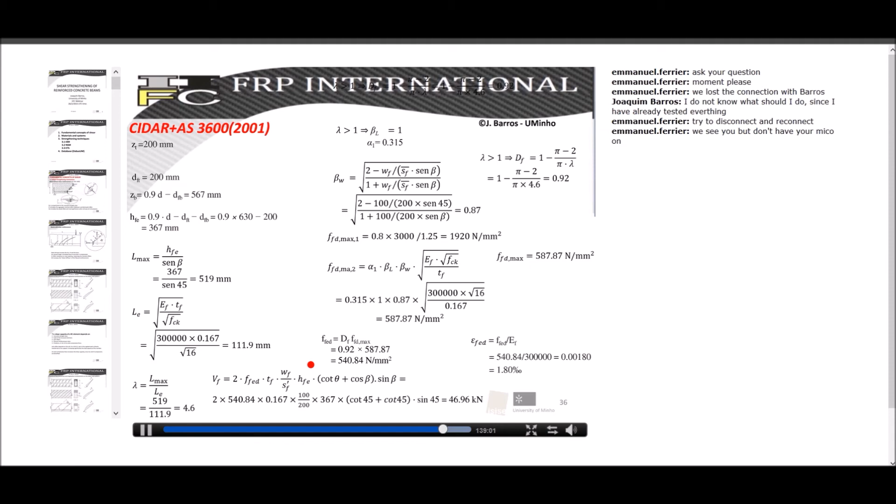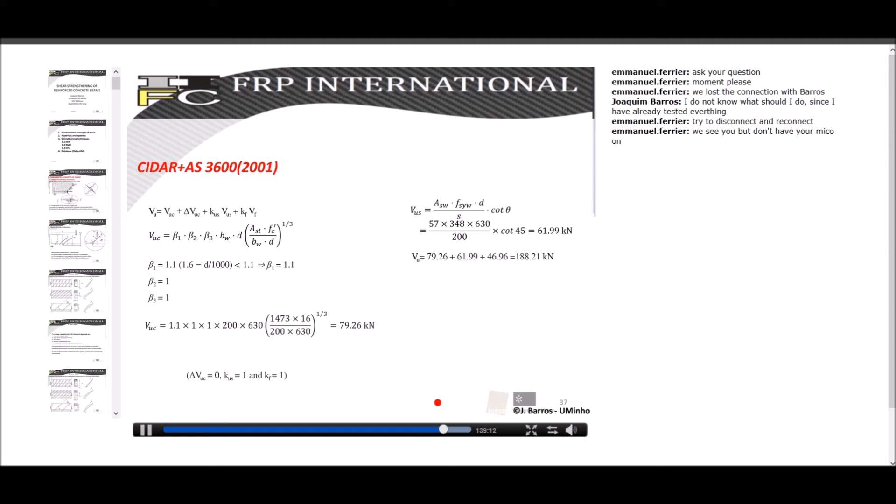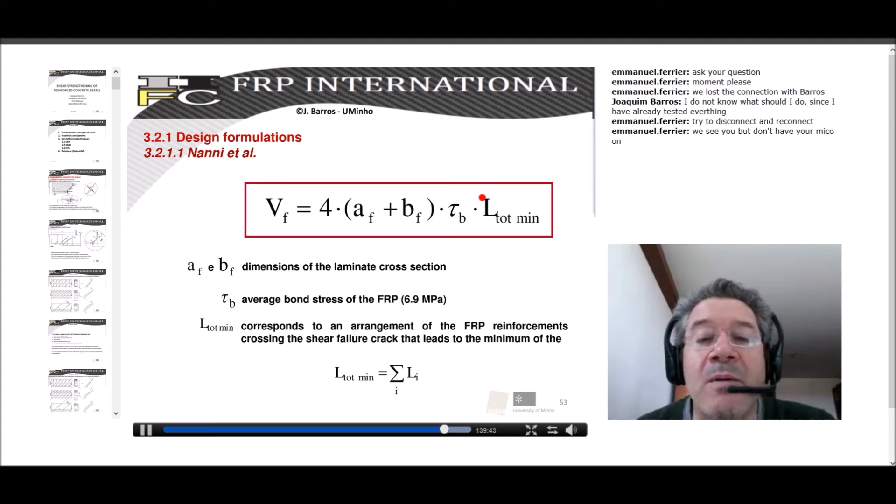Okay, so I was explaining the Nanni et al. formulation, the formulation proposed by Professor Nanni and his co-workers. So I explained how to evaluate the L_tot,min parameter according to this graphic representation.

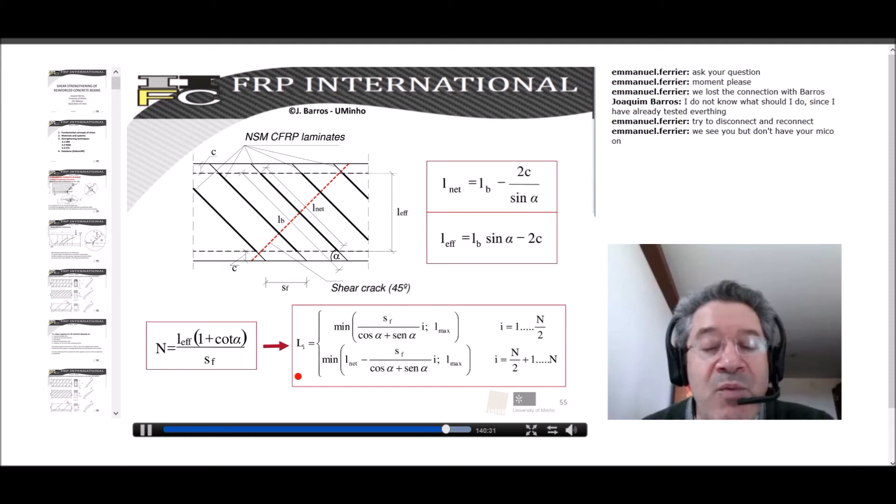And well, we also have the equations that can estimate the number of laminates crossing the critical diagonal crack. And we have the equations to obtain the bond length for each laminate. Using this equation we can obtain L1, L2, L3, the bond length for each laminate, and consequently we are able to estimate the contribution of the NSM laminates for the shear strengthening of the beams.

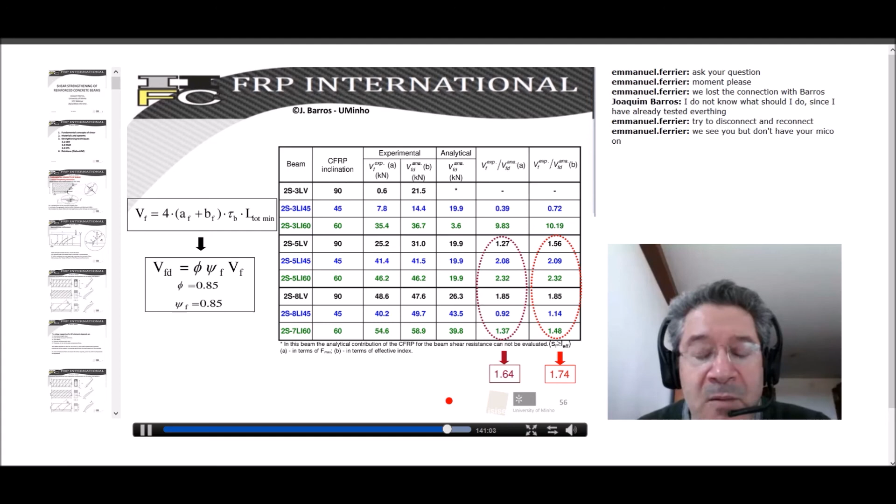And well, based on applying this model to the beams that we tested, we obtained a ratio between the experimental and analytical values that is around 1.6 and 1.7. It's acceptable, taking into account that we are dealing with quite brittle failure modes.

And we realized that this evolution depends on the inclination of the laminates. So we have a higher decrease when we have vertical laminates and a smaller decrease when we use laminates at 45 degrees. Based on this data, we proposed an equation that depends precisely on these parameters: the characteristics of the FRP, the characteristics of the shear reinforcement stirrups, the average concrete compressive strength, and the inclination theta, which is the inclination of the laminates.

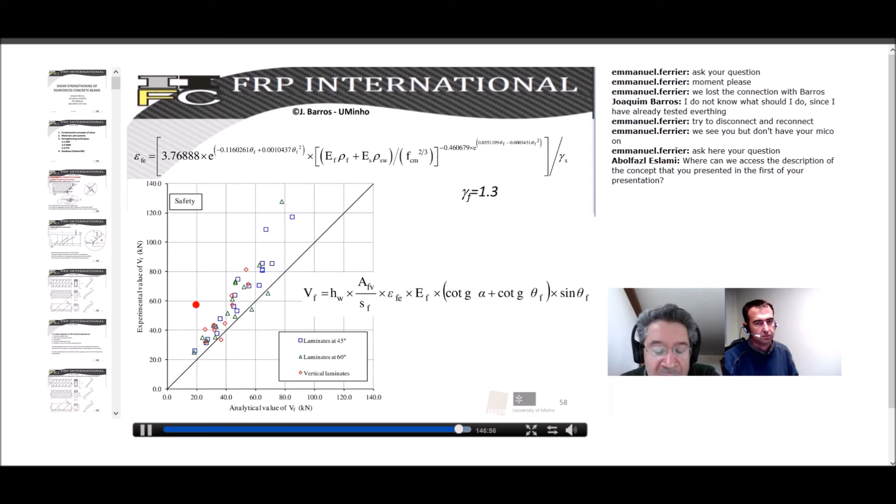Well, in fact, the available experimental research clearly indicates that the effective strain depends mainly on the compressive strength of the concrete, on the inclination, on the shear reinforcement ratio, and also on the shear strengthening ratio. This is clear, and it depends significantly also on the type of shear configuration we adopted. For instance, if we adopt a full wrapping configuration, the ultimate strain is much higher than the ultimate strain that we can estimate for the U configuration and for the side configuration.

So this is clear. This is obvious from the experimental evidence, and this is why it is fundamental to have equations that take into account this type of information. This is why we have this equation that, from my point of view, represents the most important aspects that limit the ultimate strain. So limiting the strain to 2 per mille is obviously too conservative in my point of view.

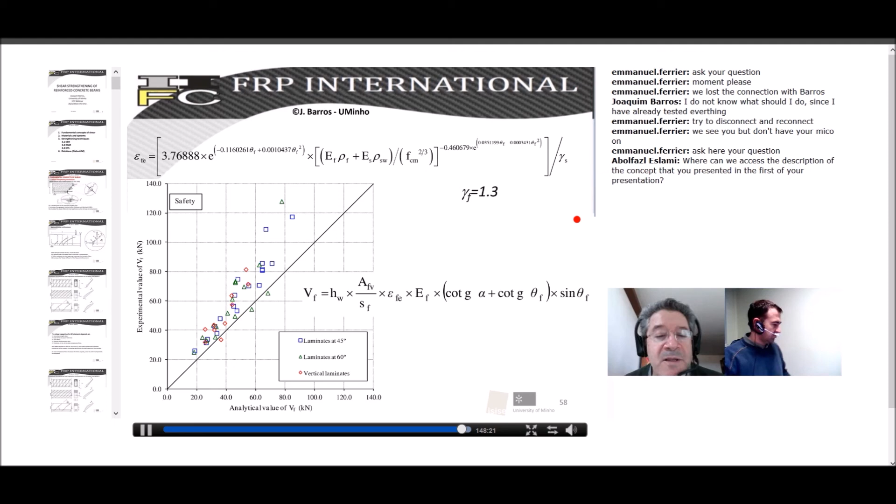Okay. There is a question from Eslami. Where can we access the description of the concept that you presented in the first part of your presentation? This question is on the public area. Maybe I don't remember what the first part was. Okay. The first part, I don't know if I can present the first slide. Can you tell me how I can go directly to the first slide?

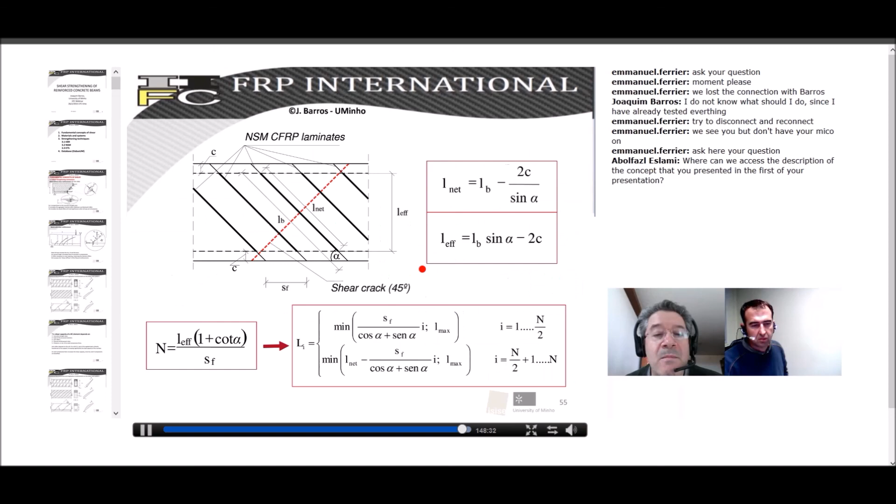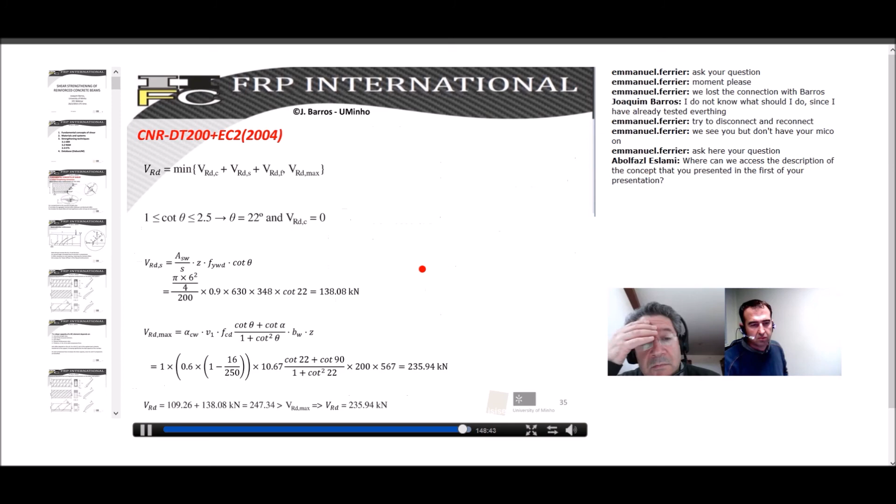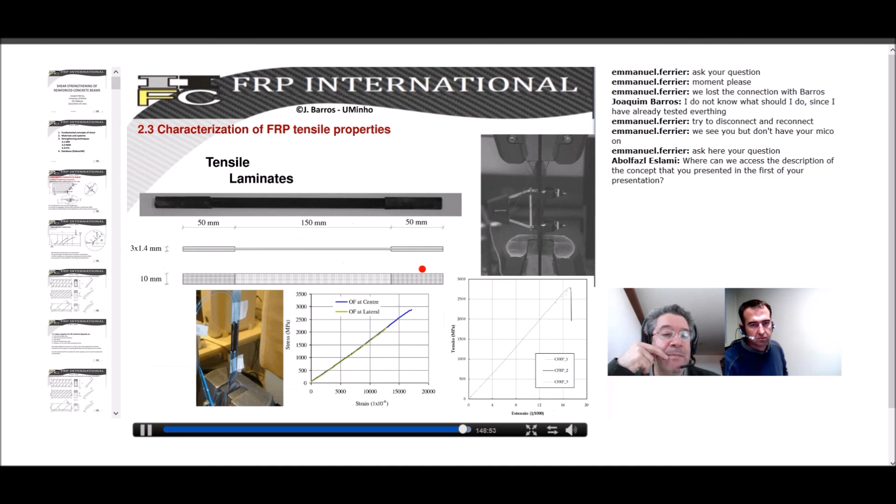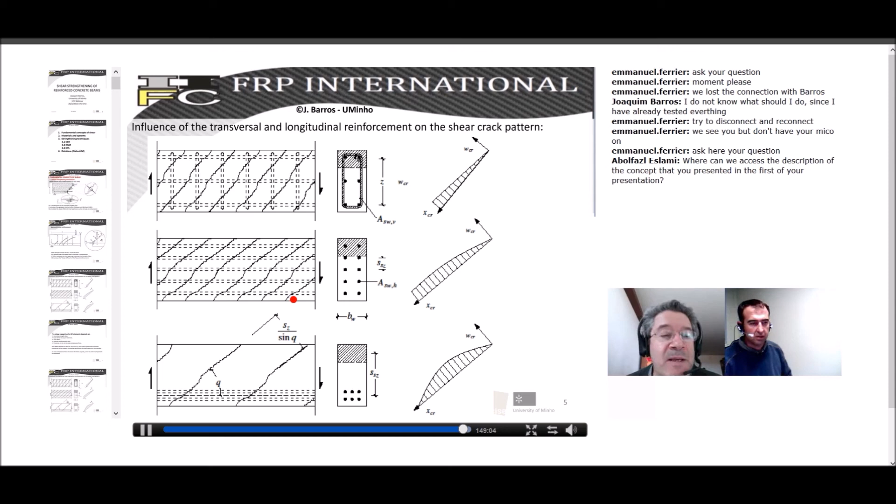Well, how can I go directly? Because it's important to go to the second slide where we have the index of the... yeah, I think we are nearby. It's by here. I don't know. Please go. Okay. So almost.

Okay. So please, can you allow Abolfazl, I don't know if I'm pronouncing it correctly, can you tell me what topic you want? Is it the fundamental concepts of shear? Is it the strengthening techniques? So please be more precise. Number one, fundamental concepts of shear.

Okay, so fundamental concepts of shear are available in a lot of books because it's the basic knowledge about shear. If you can send me an email, I can recommend some books where this type of information is clearly described. Okay, so if your main interest is getting information on the fundamental concepts of shear, I can recommend one or two books where this information is detailed. Okay. Okay, thank you, Joaquim.

So, well, if there's no other question, what I propose is maybe to send an email to get the details. Okay, so I will send you, because it's indicating the concept of shear of FRP strengthening, a document where we described the concept or the phenomenology that is underlying the FRP shear strengthening. Okay. I think it's perfect. Thanks a lot, Joaquim. Maybe he can send you an email and get the information directly.